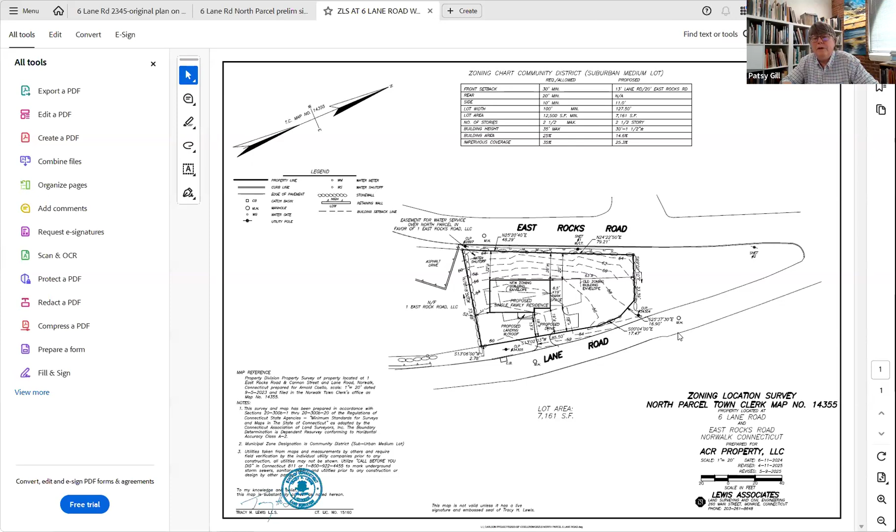Okay, everybody see it? Yeah, so the steep area is staying along East Rocks Road. Keep as many of those trees as we can. We have a driveway coming off of Lane Road. The whole pointy end of the property, beyond our parcel, all the way to the corner is all gonna stay as is, so none of that will change.

So anyway, yeah, so we have a little backup space because you need a backup space when you have a driveway. And then the driveway opens to the garage as well. So that's what's going on there. That's the garage, yes.

Let me know when you want me to show other documents. Well, I sent you, I think, the section through the house showing the slope. Yeah, give me 1 second.

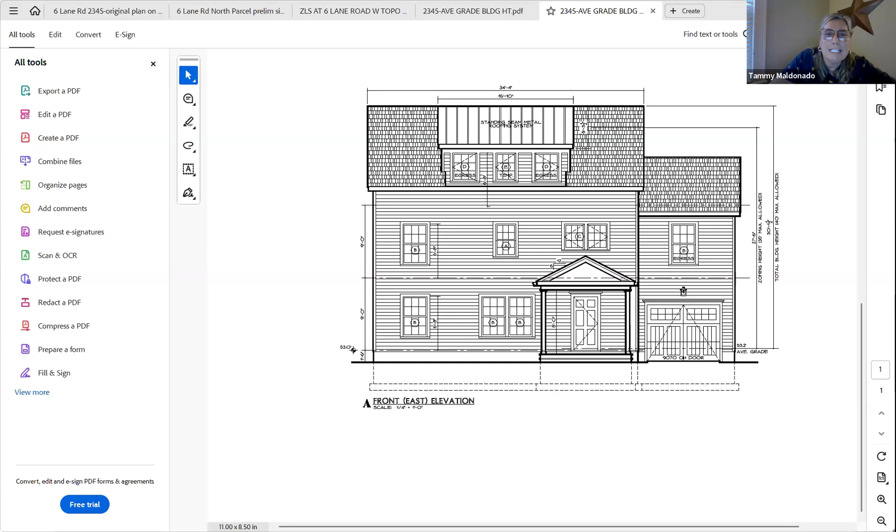Okay, so there, the north side elevation. Oh, you can see it already? Yes, slide over where you can see the actual road elevation because it continues to go up. I don't know if I have it on, yeah, there. So that's where East Rocks Road is, way up, almost to the ceiling of the main floor, and then there's the top, all the way up at the gutter line of the garage.

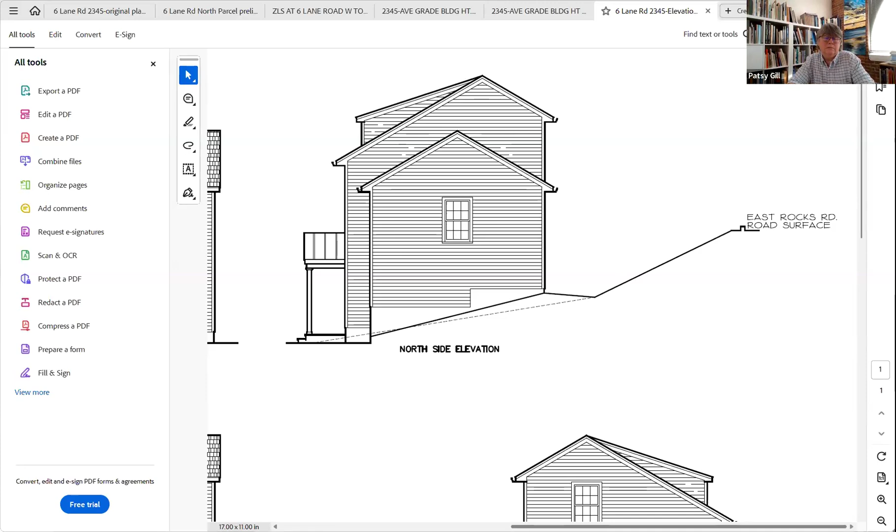Anyway, so there's a lot of trees on that slope. I think the impact from East Rocks Road is not gonna be great. There won't be great impact. And on Lane Road, you just have a single family house with a garage, so it'll be one car in the garage and one car next to it.

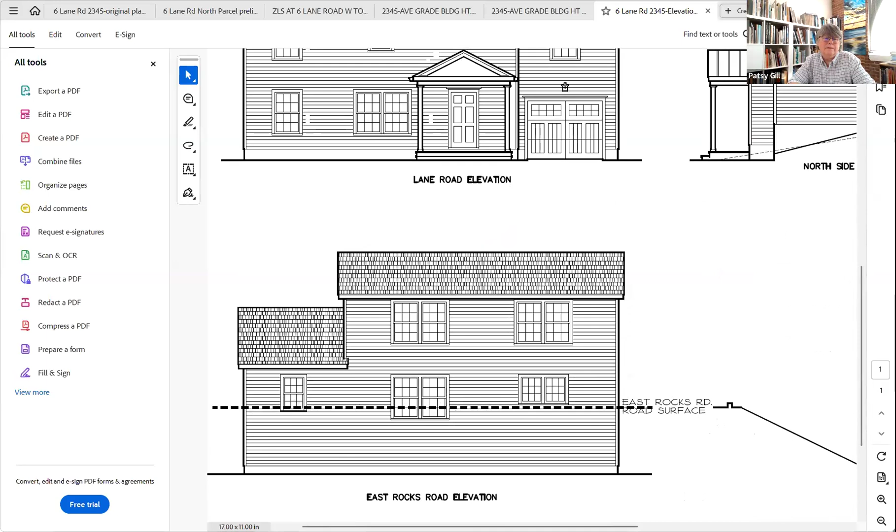So the back, yeah, the dotted line is where East Rocks Road level is. And then that's facing the stone house that's there now.

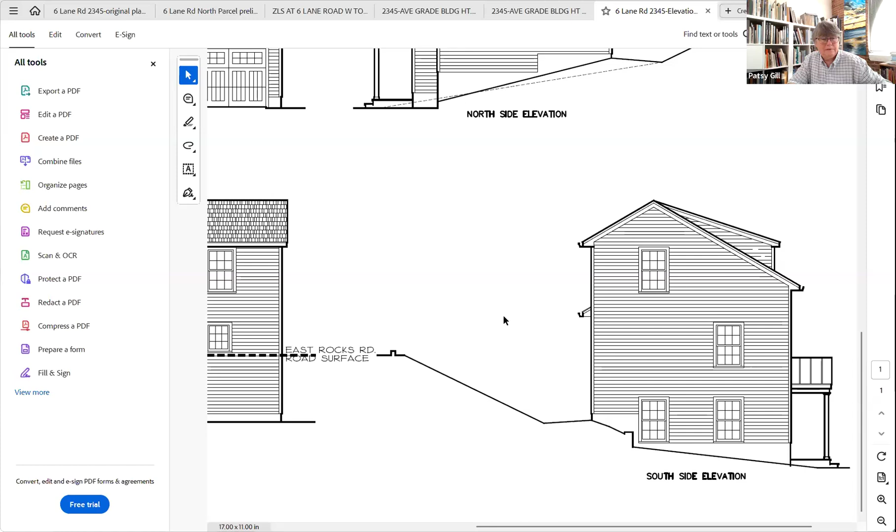Okay, do you guys have any questions? Yes, I saw no indication—I mean, is there any patio or terrace or porch location for this house? Well, there's the front porch, but that's it. I don't have any decks or patios. Okay, so if this family wants to barbecue, where are they gonna put it?

Either next to the driveway there, or possibly in the front yard over there. I mean, they might be putting up a fence, I don't know. Okay.

Is there any proposed landscaping to the north of the house where you've got the 11-foot setback? There is a stone wall along that property line. That's south? Yes, okay. We didn't spend a lot of time discussing landscaping yet. I'm sure the neighbor would appreciate some sort of screening along there. Well, this is way lower than that stone house.

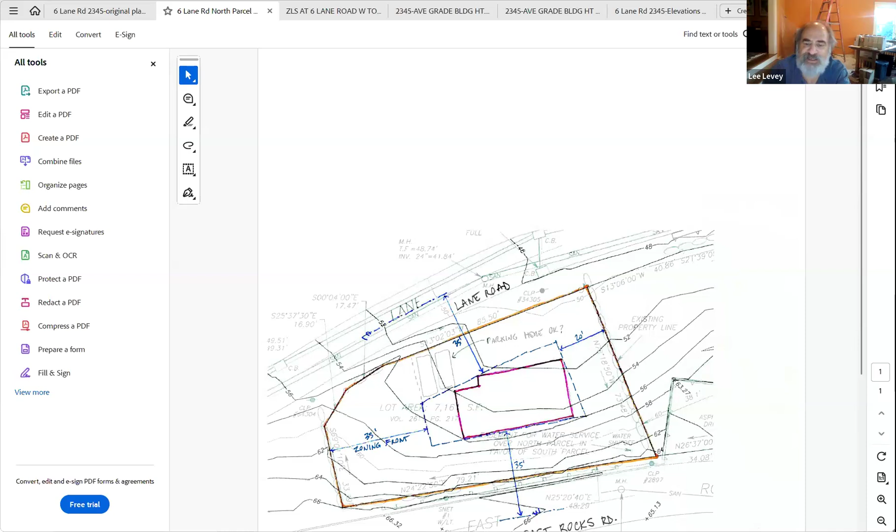My next question is, are you anticipating rock removal or blasting? I don't think we'll need to be blasting. The house has no basement, so we're just doing footings if we run into rock. The house is being set into the hillside, which naturally curves around. Do you anticipate ledge rock? I don't anticipate ledge, but we'll see what we run into.

Can everybody see the subdivision map now? Yes. So the north parcel is now flipped around, so north is to the left basically. On my drawing you can see the corner of the parking area for the big stone house - that little L-shaped piece was showing up. So the whole existing stone house is beyond that.

Patsy, let me tell you what my concern is. With the hillside and setting the first floor of the house, assuming there's no basement - my concern is that if you're going to be blasting or chipping away at rock for the rear of the house, there could be potential damage to the old stone house. Has there been any concern made about that? Are you going to be taking any precautions, such as documenting the existing structure and its condition prior to your work?

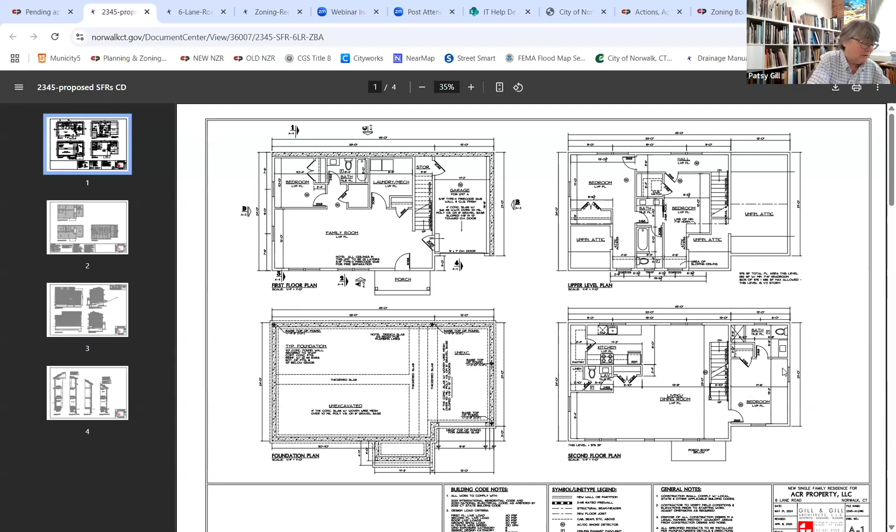How many total square feet in the house? I'll get it to you, hang on.

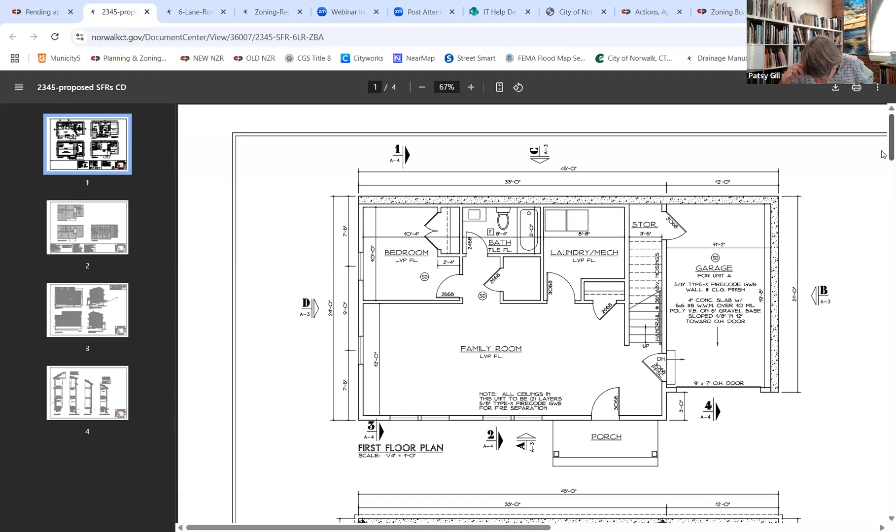There's 976 square feet of finished space on the second floor, and 582 on the top floor. Mostly I figured that out just so I could be sure that it was a half story. That top level is a half story, just 2 bedrooms and a shared bathroom. Oh yeah, there's my half story calculation.

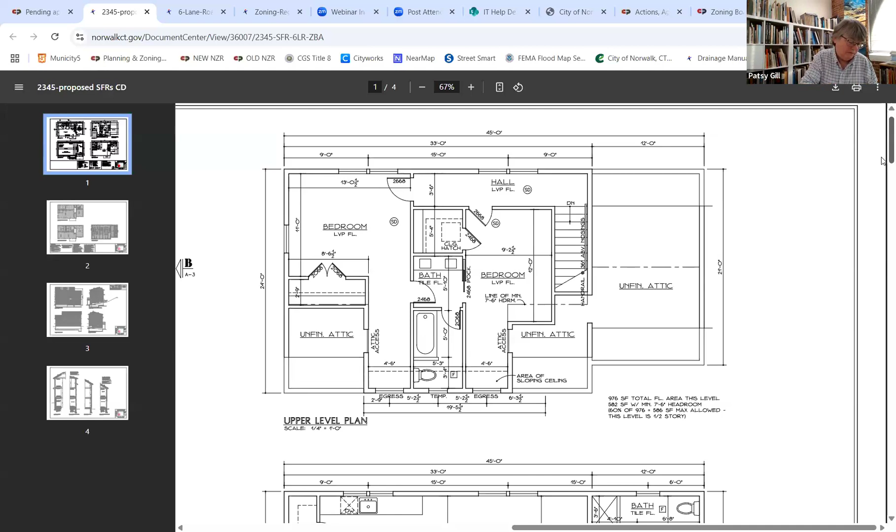Any other board members have questions on this? Yeah, I've got another one.

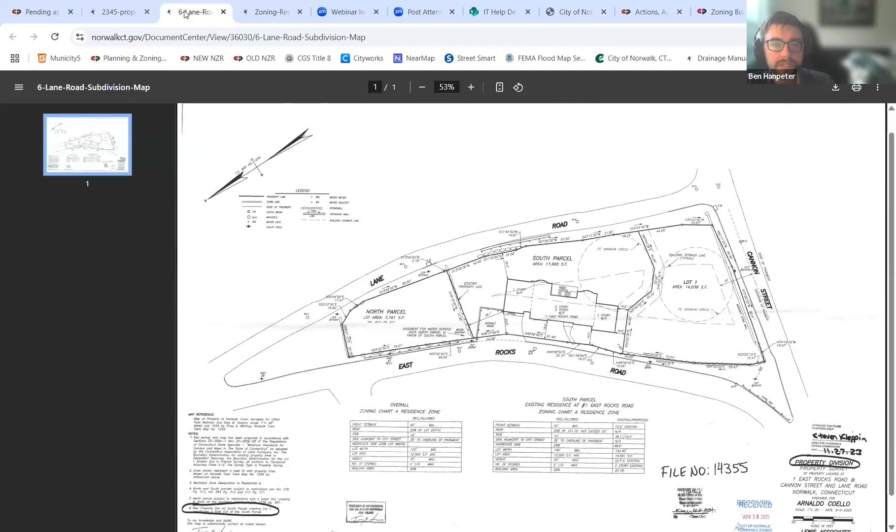The driveway and turnaround area is pretty close to the street. I went by the property today to take a look, and it looks like right around where that turnaround is there's kind of a rise off the street, with a couple feet of dirt. So I'm wondering how you plan to handle that - are you going to be taking some of that dirt away so the driveway is closer to street level? And then what will eventually go in between the turnaround area and the street? I imagine they're not going to be literally right next to each other.

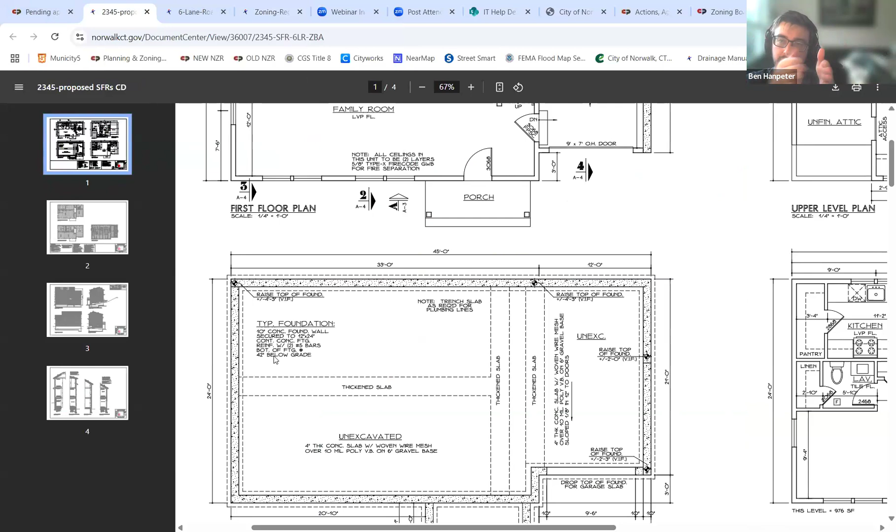No, there's going to be a buffer strip there. And then there's how wide this is - the first 8 feet from the street is still the street right of way.

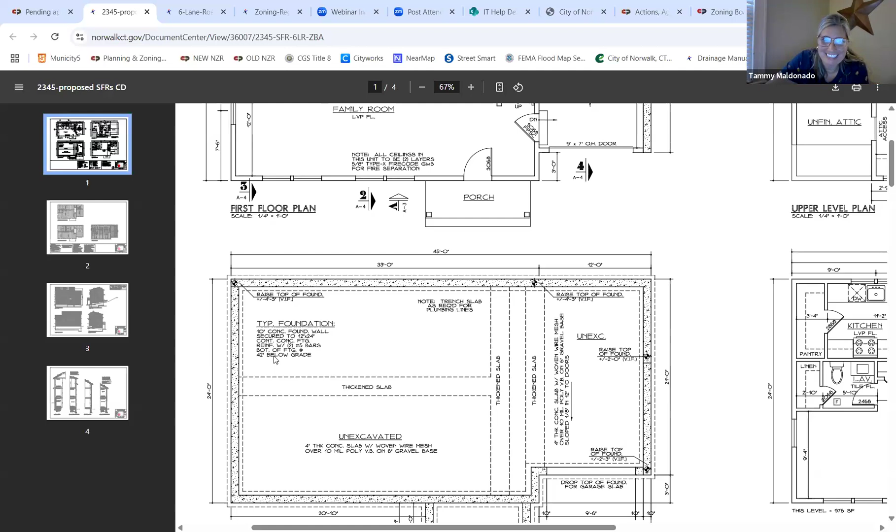So then my site plan - Tammy, could you go back to the site plan? Yeah, I'm trying to, hang on one second. All right, here we go. Can you see it? Yes, thank you.

So the driveway flares out onto Lane Road, and that's 8 feet from the property line to the actual street. It gets narrower as you go north and a little wider south, so I'm just estimating.

Do you have an idea of how much material removal you might have to do to make that work? Not yet, but we're trying to leave as much of the natural grade as possible. We'll level things out at the driveway area, and we're going to fill in a little bit behind the house so it doesn't just slope straight into the house - we have to build it up a little bit to drain the water away. So some of the grade will be manipulated back there.

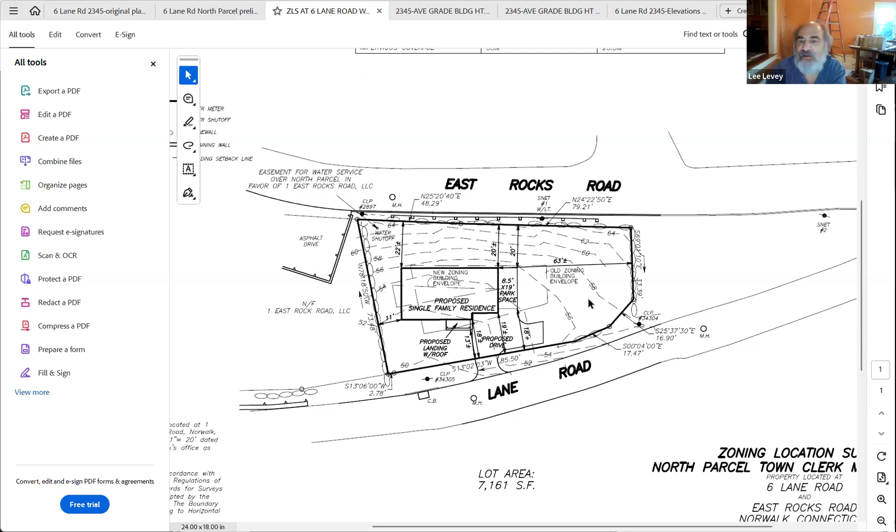How deficient is this lot size? Oh, there it is. So the required is 12,500 square feet. This is only a little more than 7,000 square feet. So you've barely got 60% of the required lot area. Right.

How much building area do you have on the lot, given the required setbacks, if you had to conform? You see the cursor tracing that triangle? Yes, that triangle is the buildable area. Okay, that's pretty minimal. I might be able to fit a treehouse.

Well, I will also assume this house is served by city water and sewer. Yes. Okay.

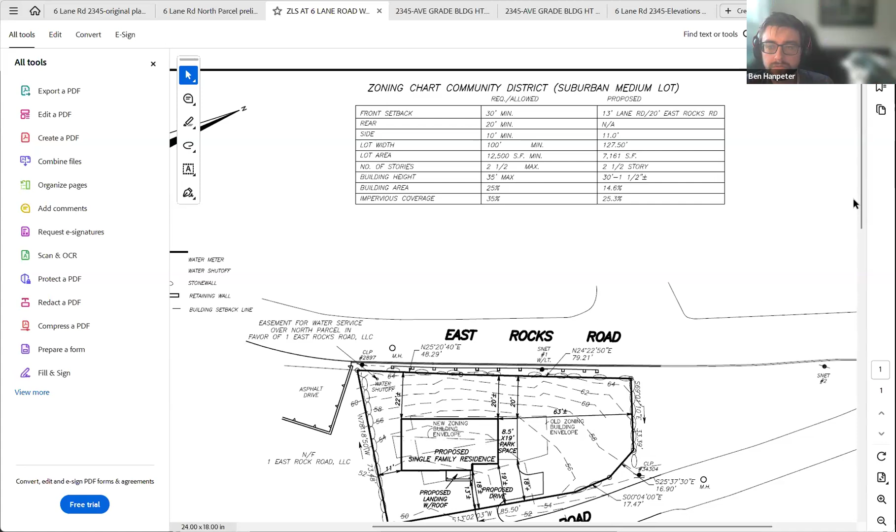That comes off of Lane Road? Or East Rocks? Lane Road, I believe, there's some in both. And it certainly would be easier to come in off of Lane than East Rocks, because again, to get sewer and water off of East Rocks, you'd be certainly going through Ledge Rock to accomplish that.

Any other questions? Well, hearing nothing from the board...

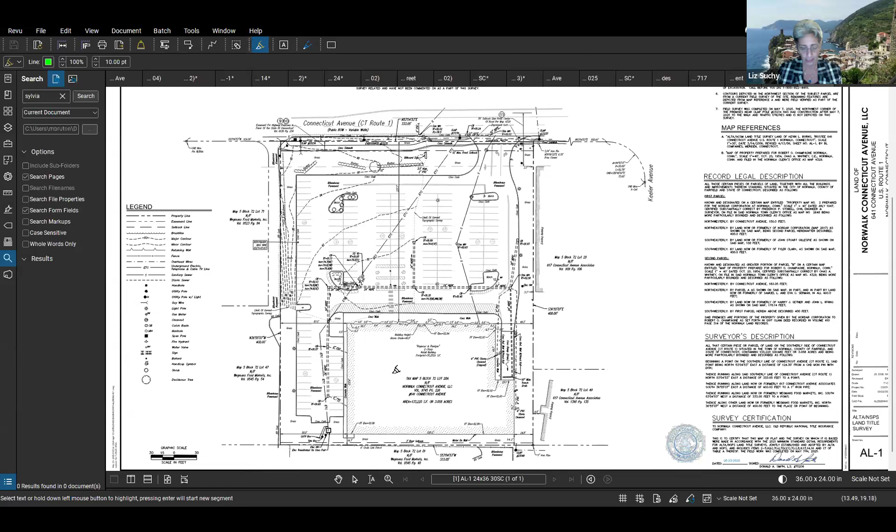So the proposal, a bit unique and fun, something Raymour and Flanagan has done at some of its other locations, is to create this kiosk drive-up or walk-up concept for folks to come and get coffee. There are no reader boards, no pulling up to give your order to a microphone. The barista staff actually meet the drivers, they meet pedestrians if they want to come up to the site, take their order, and then those orders are filled and given to the customers.

The difficulties we have, and that's why we're before you, is that there are a variety of conflicting policies, challenges, and regulations that present some unique challenges for this particular very small development.

The main building where most of the order filling would take place is approximately 530 square feet, less than what an accessory dwelling unit would be in the city of Norwalk, plus a small refrigerated building about 250 square feet, probably the size of a small single-family garage.

So we tried to do what we thought might be best to accommodate our client's desire to locate in Norwalk. If this is approved in whatever shape or form, it would be the first 7 Brew coffee kiosk in Fairfield County. There's one in Vernon, and I think there's one in Wallingford. This would be the first one down here, and it's kind of an interesting, unique concept.

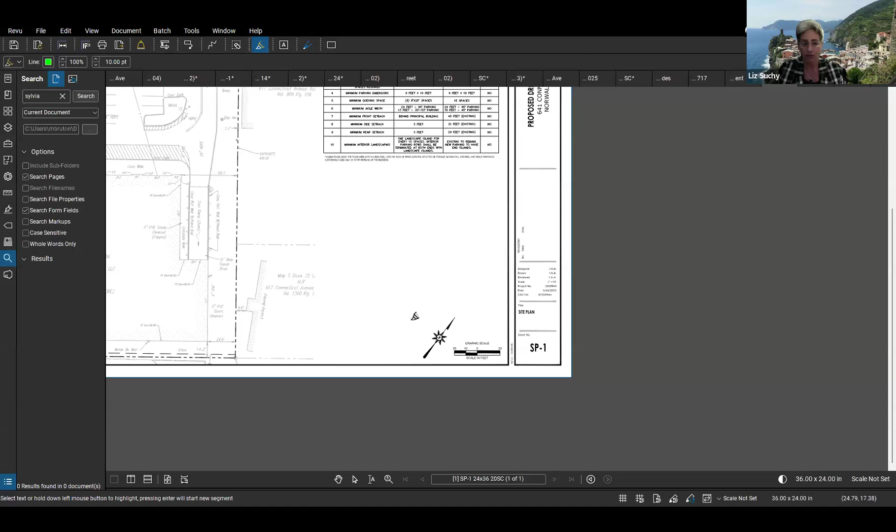There are pedestrian crosswalks proposed inside the site, so individuals can walk up Connecticut Avenue, come onto the site, walk up to the kiosk and get coffee if they'd like, or whatever other specialty drinks are available to them. It's very hard to come up with a 2-story structure for such a small required space, 530 square feet, making it 2 stories. I think the second story would end up being not used, much like the Starbucks at the Darren Plaza.

It's a 2-story structure, built under the prior regs that required that 2-story structure. That second story is vacant. The same is true for Chick-fil-A down the road. 2 stories were required, and that second story is vacant as well. I think for a very small structure like this, that second story would be space created really for no reason. So I think those are the real hardships we're wrestling with.

Those are the challenges and difficulties that applying the new regs onto an existing built site make it very difficult for us to comply. In addition, we had some discussion with staff that perhaps this shouldn't be viewed as a principal structure, but an accessory structure. If it was an accessory structure, I think we would comply in all component parts, but that was not a concept readily embraced by the staff for whatever the reason. So that's where we are.

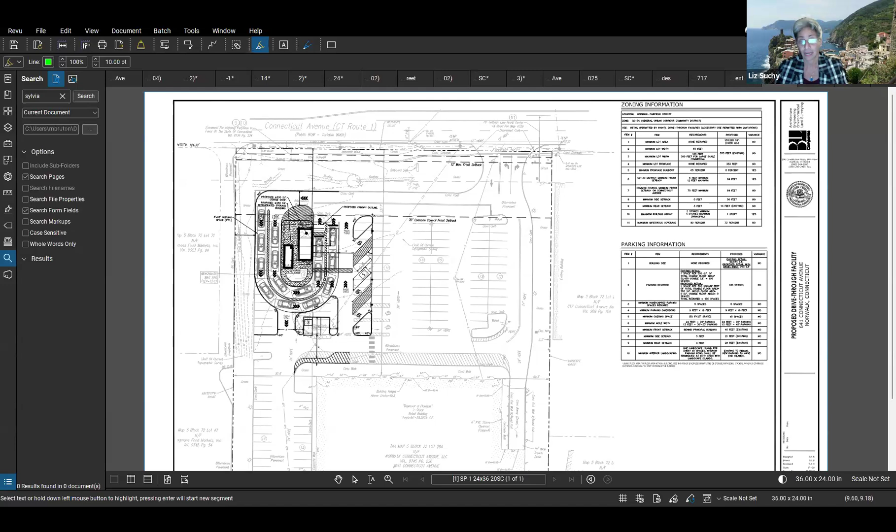We'd like to think that this is a concept that the commission, this board, would see some value in. It would activate a portion of the lot that is just asphalt, parking spaces, some activity. There'd be some additional green space created. We would abide by the 70-foot common council front setback and leave that whole planted row, that whole green space that exists from property line to property line in its place. And that's a very wide planted component of this property.

How wide? Matt, how wide is that about?

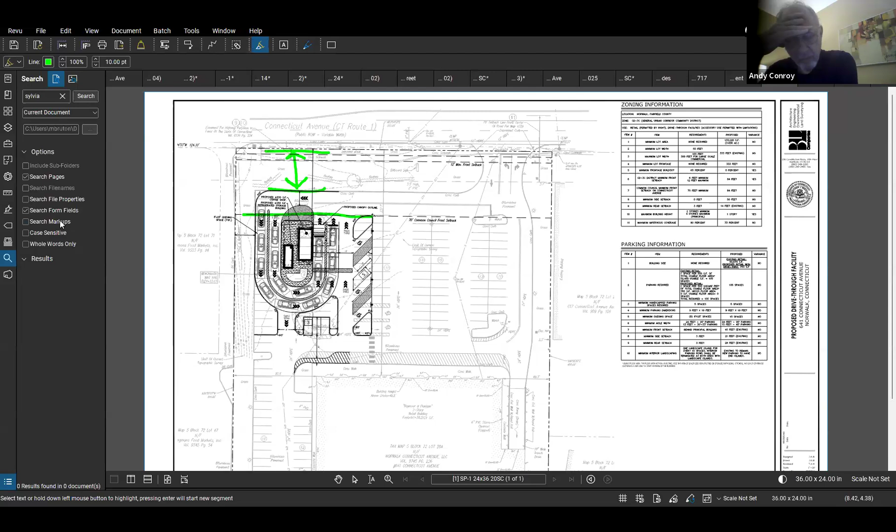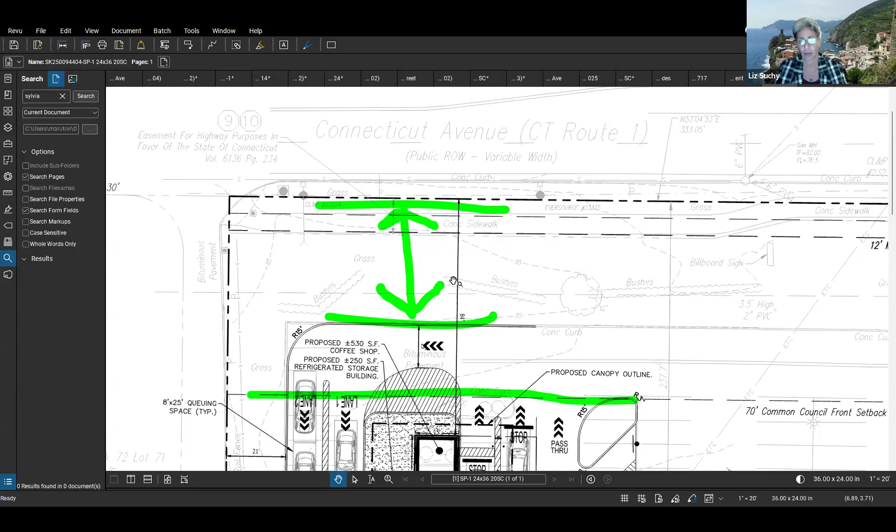And while he's measuring that, that's the reason the common council setback is why you have some of the properties on Connecticut Avenue on both sides have such an open distance between the property line and where construction or parking can be. The same is true on Westport Avenue, and the same also exists in certain portions of Main Avenue. I think Westport Avenue is a 50-foot setback from center line, and Main Avenue may be 70 feet as well.

So there we go, it's just about 32 feet. And there are bushes and some trees. Is one end of that arrow the property line?

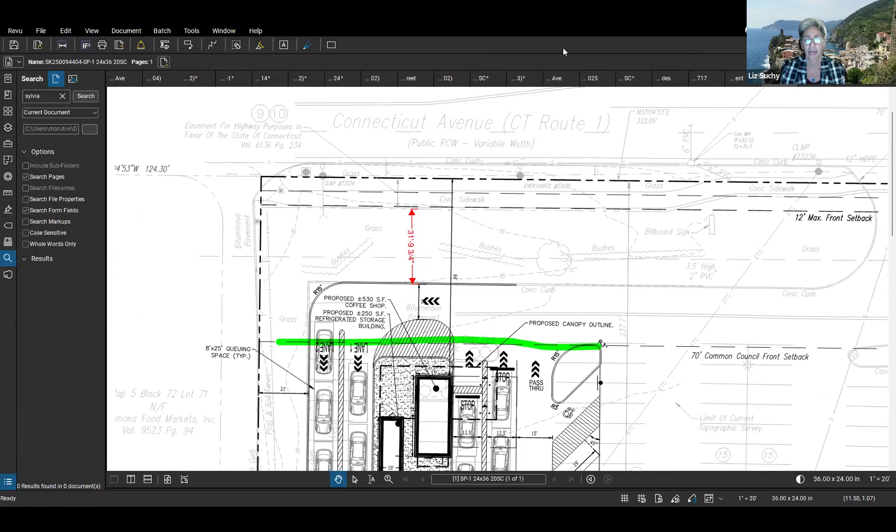The 31 feet is measured from the back of the sidewalk to the back of the proposed concrete curb. Matt Bruton, professional engineer from BL Companies, 355 Research Parkway, clarifying the property line measurement.

This is about 32 feet to the concrete sidewalk, as labeled here. If we were to go to the property line, which is this bold line, we're about 45 feet. So the sidewalk is the only thing in front of it. I can give you a Google Street View if you haven't been out there recently, showing the sidewalk along the frontage, mature trees, bushes, and planting beds.

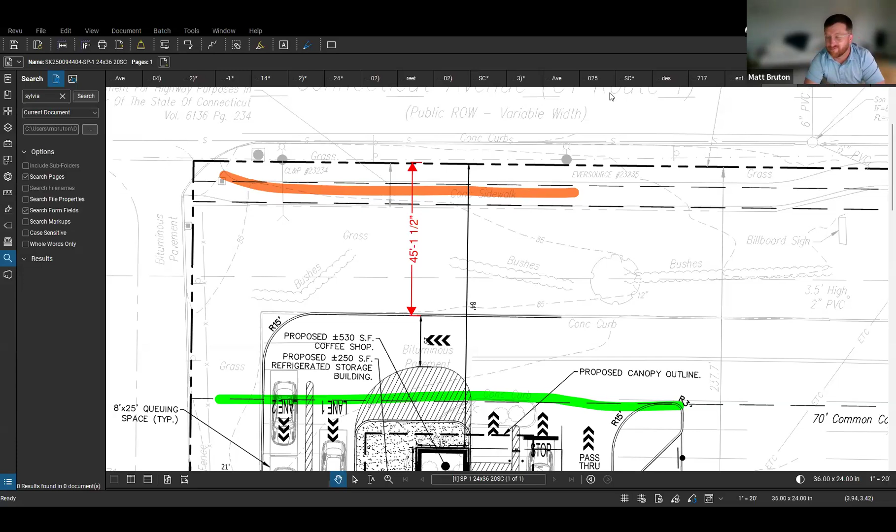You can see the Raymour Flanagan in the background. If I pivot here, you can see this is pretty consistent along the whole frontage of the property. We thought it was valuable to allow that to remain instead of shoving a small building within 6 to 12 feet of the front property line, which are the minimum and maximum dimensions under the new regulations. We thought it would be more beneficial to keep that green corridor from property line to property line.

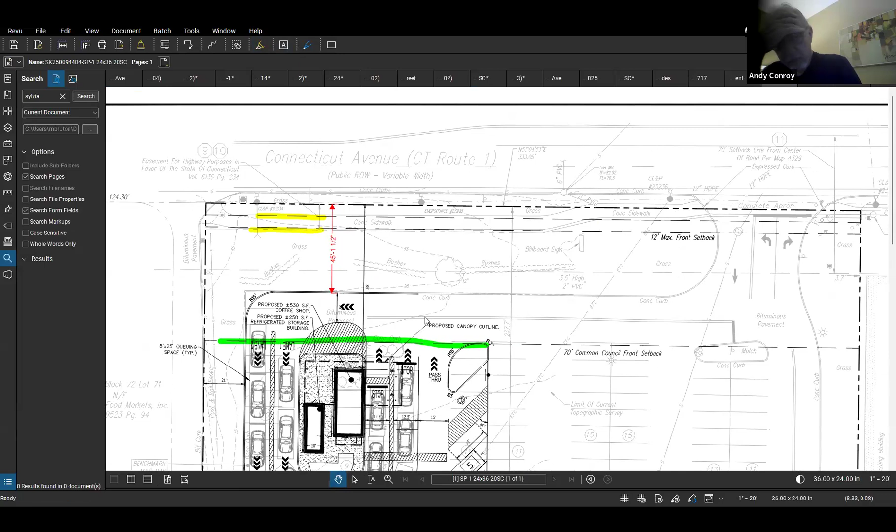If you took the two structures and made them parallel to the road and moved them right up to where the green area is, then ran the circular traffic area along the side, with the other side facing out to the sidewalk, maybe with some glassed-in areas on the building to make it more attractive—is that a possibility?

I would imagine that it is. The only difference is we probably could comply with the maximum 12-foot setback, and we probably could redesign the building to achieve the 2-story if that's something this board deems absolutely essential. However, that 60% maximum building build-out along Connecticut Avenue, that we can't achieve.

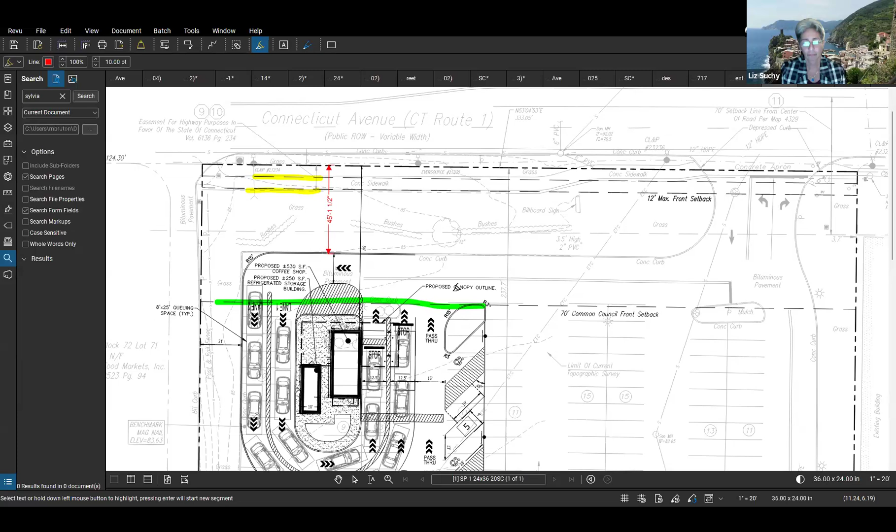Chairman Conroy, you're absolutely right. If we were to make the buildings parallel to Connecticut Avenue and bring them closer, at least I would suspect one variance may be eliminated, and with some design work on the structure we might even eliminate the second. We just can't get that 60% frontage build-out—it would have to be a very long, 150 to 160 foot long building for a kiosk.

I don't think your business requires that kind of frontage. No, it doesn't, it doesn't. And it would look absurd to create it. So I'm sure the variance could be had there, but I don't know about the second story—I'd have to hear from everybody else.

Rather than spend an inordinate amount of time and waste your time, if this suggestion or alternative is something that, after the rest of the members weigh in, you'd like us to pursue, I'd ask that you consider keeping the hearing open. We can devise a plan to perhaps eliminate one, if not two, variances, bring that plan back to staff, and come back to you in August with that alternative. Maybe the principal planner and zoning enforcement officer might see greater value in it.

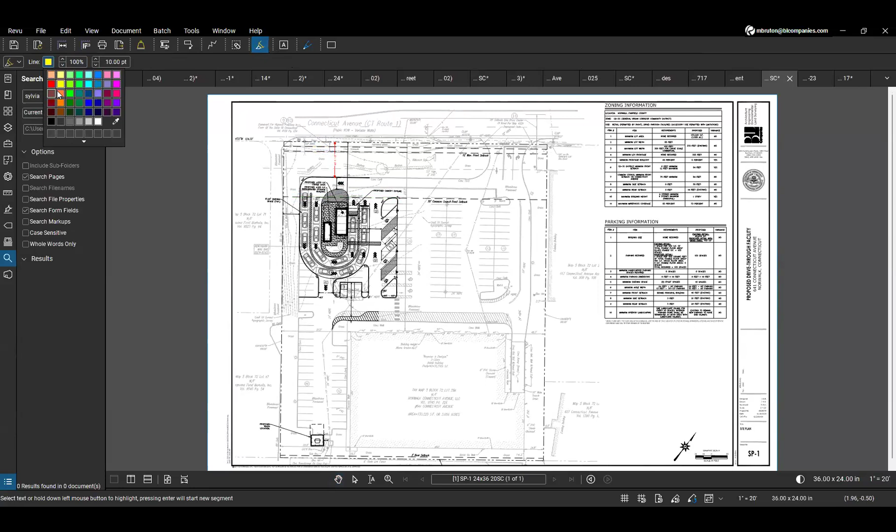Mr. Chairman, while I totally appreciate your effort to help us find a way to take away one additional variance with the setback, I'd encourage you to think—and it sounded like, I was just listening to Danielle read the planner's comment, and I just want to note that it sounded like the overreaching theme was to make things more green and walkable. And if we push this building, we spin it 90 degrees, put it in parallel, and push it to the front of the building—yeah.

I totally agree with you. It gets much closer to your code, sir, but it's going to take up green space. So my parking lot will remain asphalt.

Yeah, before you go too much further, what I was talking about as a possibility is moving the building—just think of it at the moment—building up against the green, maybe intruding slightly into it and running the traffic along the side facing Raymour & Flanigan. And you could pretty much use the design you have for turning cars around, but tilt it, move 90 degrees. And you can take all your green and add it, and I think it would work.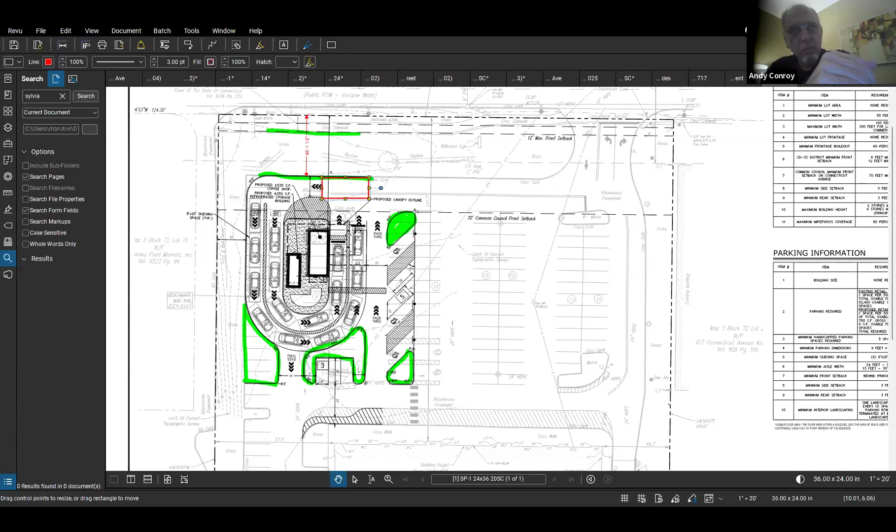I know that you can't meet the distance requirement, but you can come a lot closer, I think. Yes, sir. If that's something the board wants to see, Matt is fantastic at what he does. And I know that Wade and his team at 7 Brew will work to be accommodating.

I would also just consider the zoning staff memo that was read, and really think about: is there a way that this business works where it's not an island in an all drive lane? I think if we're really trying to make Route 1 more pedestrian friendly, making buildings that are primarily going to be completely encircled by cars is not in line with zoning staff's goals.

Yeah, Danielle, what they were recommending was not circling the building. Right, but I just want to clarify that it's not just taking the circulation and rotating it. It's really considering how does the circulation work, and how does this business work—maybe a little bit differently than some of their other concepts—but how does it more seamlessly blend into the zoning goals of the city of Norwalk?

Right, and the green that they have around the traffic circle and the parking, I think, is something they want to maintain. That helps get rid of the enormous ball field of asphalt.

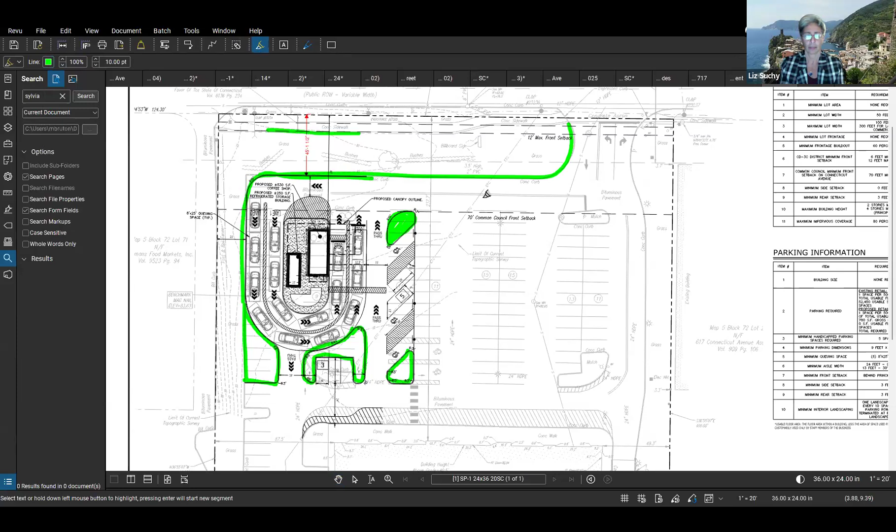So, Mr. Chairman and other members, and of course I don't want to speak for others or prevent you from chiming in and sharing your thoughts and comments—is it your preference that we take a look at Commissioner Suchy and Chairman Conroy's ideas, provide a revision to staff, and present that to you in August?

Speak up or forever hold your peace. I think it's a worthwhile exercise. I think bringing the building closer to Connecticut Avenue without automobile traffic between the building and the green space would certainly encourage walk-up business from those using the sidewalk and bus stops. I do think it's a worthwhile effort.

So that was positive, I think it's worthwhile taking another look. I did have a final question related to access to the shop from the road, which we've just talked about. Also, I think what was mentioned is that your staff at the business would also use this, and it wasn't clear to me if there are any pedestrian safety issues, either walking from the store or walking from the street.

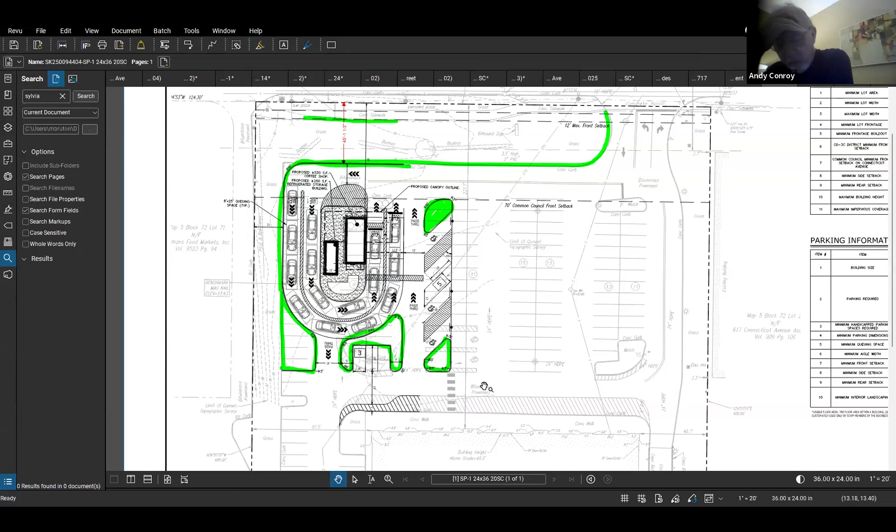Let me ask real quick. We have Popeyes, we have Chick-fil-A, forced to 2 stories. And how big Starbucks is this, as well? How big is this building compared to, let's say, Popeyes?

I can't say with specifics, I can certainly get that to you, but this is 500 square feet. Popeyes is a restaurant where you can go in and sit, and it has a circulating drive-through in the back. Starbucks, I don't remember the numbers offhand, but it's certainly larger than 500 square feet, as is Chick-fil-A. I can get that information for you. What I was wondering is if this building's too small to try to push it up to 2 stories. That's what I was wondering.

Chair and board, if I might step in -- Wade Harden, 2710 48th Street, Springdale, Arkansas, with Corporate 7 Brew. I think you'll find that the majority of Popeyes are probably between 1,600 and approximately 3,000 square feet, so probably three plus times larger than the structure we have here. I think we hear the concerns as far as rotating the building and addressing the street frontage. I think there are some things we can do there.

We hear that. I guess one clarification to the two-story point -- could you elaborate on that or provide some feedback? I think that's where you were going, but that would be helpful. I don't have the answer, I was hoping to figure it out. But one aspect would be the difficulty of making a very small building 2 stories. I think that could be an issue, and a variance for that. But I wanted to compare it to other approvals we've given where only the 2-story requirement was met.

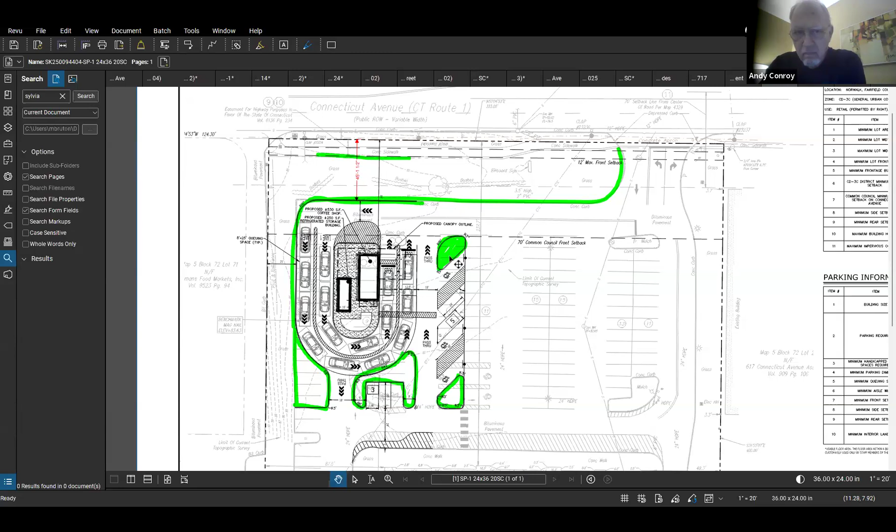Well, I'm going to weigh in on this. I don't see the necessity for 2 stories. I see one of the problems with a structure of this size having 2 stories -- it requires, because it's a commercial building, 2 means of egress. Where do you put 2 sets of stairs? That's almost 500 square feet unto itself. Yeah, I think it's problematic.

I think Mr. Lyon and Chairman Conroy were -- 3 of us at least -- probably leaning in the same direction, and that is that 2 stories is a requirement, but it's a practical difficulty, it would appear. More to the point, in addition, if you've got precedent where, did Ms. Suchy say, 3 other businesses have been required to have 2 stories and they've got empty space? It seems not smart to build things that you're pretty sure are not going to be used.

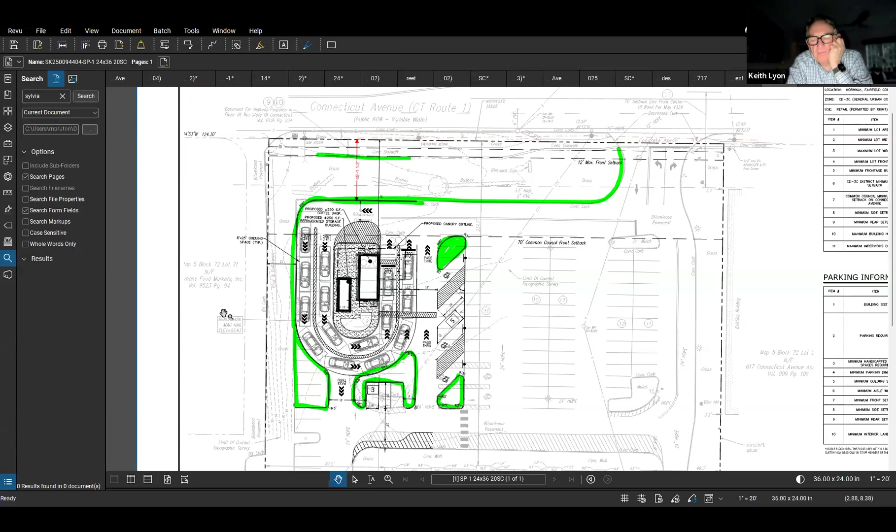There are 2 that I mentioned, Starbucks and Chick-fil-A. I know personally those upper floors are vacant because I worked on those particular buildings. I believe the same is true for Popeyes. I can confirm that.

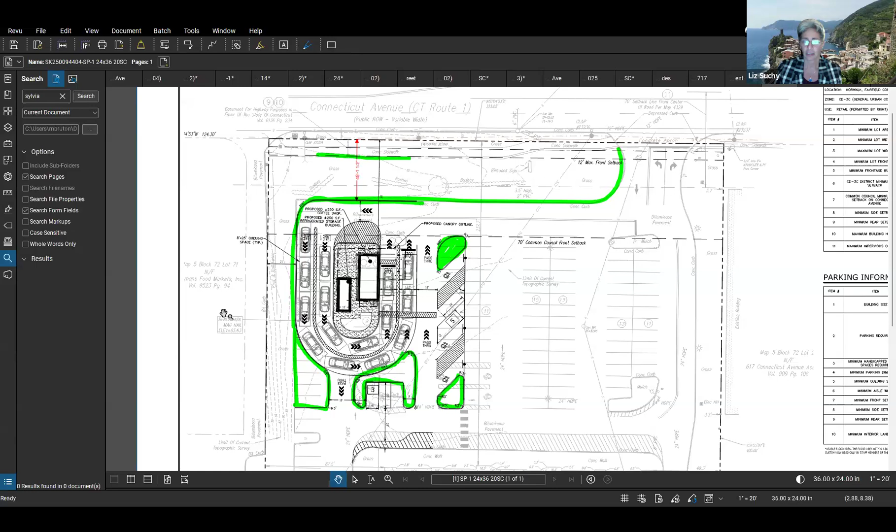Chairman Conroy, for your information, I can get the square footage numbers and have that for next month, so you'll have a comparative to what this is. There are several others in town, for example the Burger King up at the Stop and Shop on Main Ave, south of the Merritt interchange. That's a 2nd story, I'm not sure if that's vacant, I believe it is. But if there are others in town, we'll get a list and the comparative square footages to give you a better sense of how this compares.

The 2-story McDonald's does actually use both stories. Yes, it does. Danielle is about to break out laughing. Andy's too familiar with McDonald's. It's the play place, we know it's the play place. You're going down the 2-story slide.

Something like that. Danielle, you being an architect, is any of this making sense to you? Yep, I think it all makes sense. Okay, then we're happy to review and come back to you and see what we can do to address your concerns, and we'll go from there next month.

How's that? That's good. I have a question for Liz, hold on. Andy or Liz, for when you're done, not tonight but in the near future, would you give me a phone call to talk about not this, but business gone past? Certainly, I'd be happy to, Mr. Conroy. Thank you. I have a question for Andy or for Tammy.

So if we choose to issue a continuance, that would have to happen before the public hearing's closed and also before deliberation, right? Yes. Okay. Because I don't really have much in the way of questions about this application, but I definitely have some thoughts about it that I was going to save for deliberation. But if we're going to continue it, then I'll just say it now.

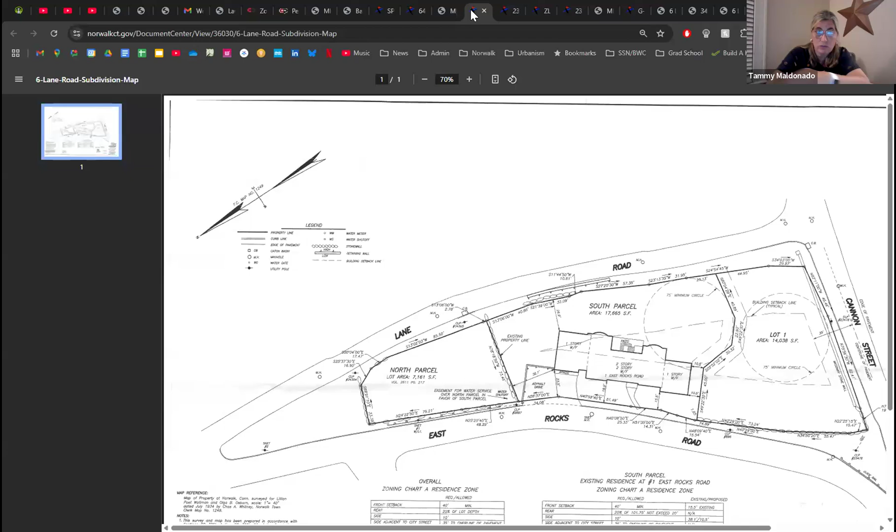Well, in this zone there is a principal and a secondary, but they're the same for CD1M. For CD1S, which is smaller lot zones, your principal is 30 and your secondary is 20. Under the old building front footprint, their zoning front was actually that little rock wall sliver to the north. But we can't count it, because when you go 30 to 30, it compresses that building envelope so that it becomes, even if there's no need to apply another setback, forced way back there. The setback would sort of be 30, 30, 30, but you can't really.

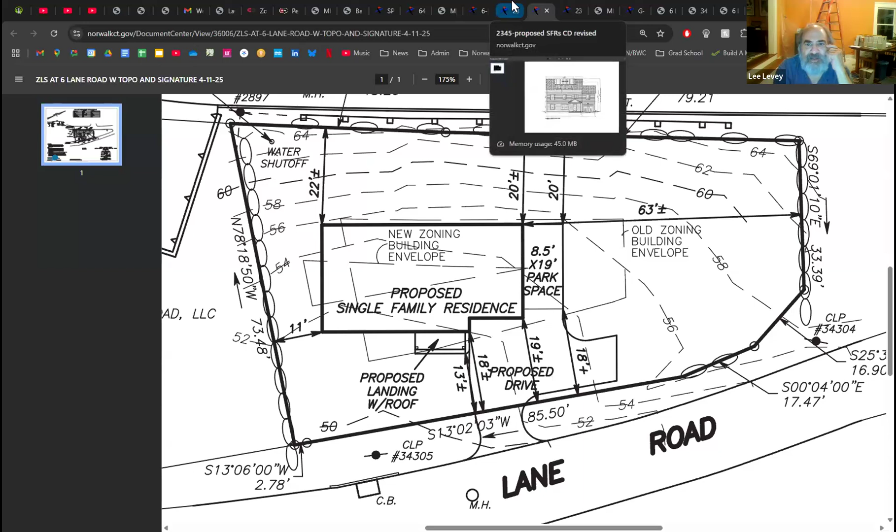Remember the line that they showed, if you were on East Rocks and looked at the building, there was basically a level line going across the house, which implies to me that they had to excavate somewhere between 7 and 10 feet for the back of the house. Yes, they're burying the first floor into the hillside.

Go up to page 3, and then over to the section. I think it's the side elevation, it showed it very well. So if you just scroll it over, squeeze it down a little bit, then they know what it is.

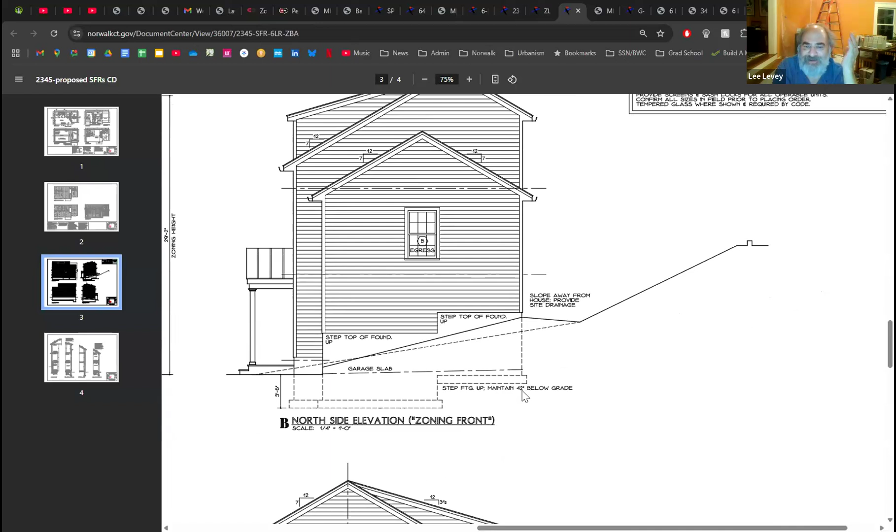Is this the line? No, it can't be, because it wasn't that far up. Yeah, that's the line. Well, then they've got to dig down, and I'd be shocked if they didn't have to blast. Well, they don't know what rock's under the ground, 42 inches below grade. Doesn't look too far down, at least not to me.

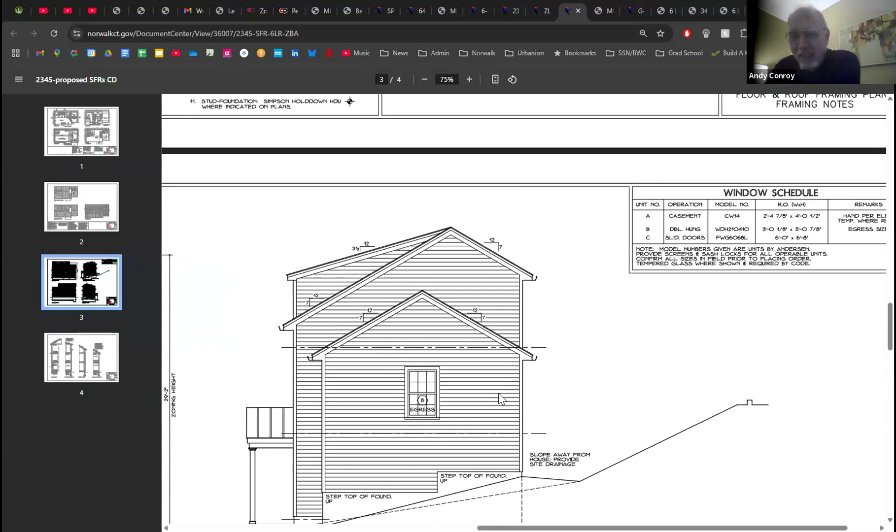The glacier that went through here didn't leave a whole lot of dirt. You're not that old, Andy. You'd be surprised, I know Methuselah, he's a friend of mine. Oh, very good, very good, see you at O'Neill's for trivia night.

But remember, I'm not voting on this, you guys are. So Lee, you're gonna have to keep it together there.

I would like to raise a very important point that Ben brought up, of wider implication than this one application. Can the new zoning regulations be considered a hardship? I thought not. The only thing that you could do is if you did your application before we adopted it last February, then you get to exist under the old regulation. So that's the hardship, if you'd already applied.

I'm pretty sympathetic to this, except for the fact that she mentioned that they did have the house designed, like they were gonna do it, and then the regulations changed. Well, okay, then you should have done it.

Some people own property around here for 20, 30, 40, 50 years, and they don't pay attention, and then they would need a bunch of variances so they can build. As long as, at least my recollection, the board, as long as the variances were not particularly large, because it was a small lot, we generally approved it, disregarding any other problem that might have emerged.

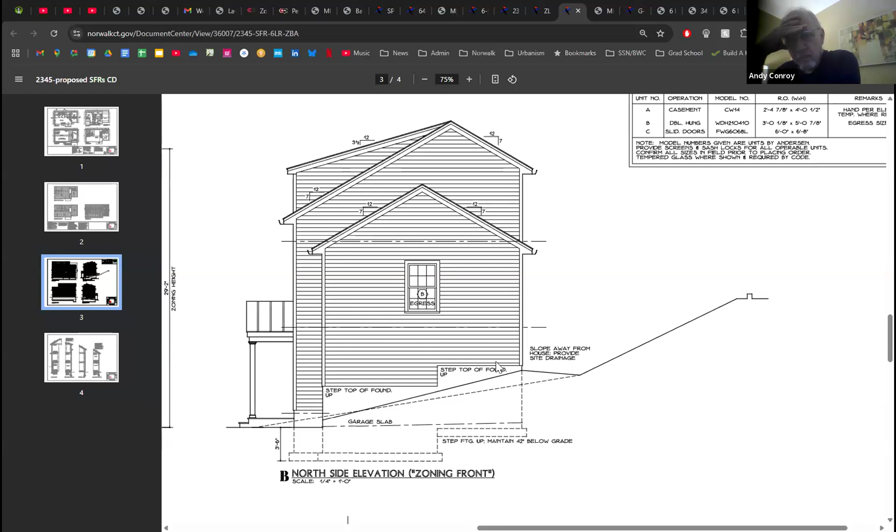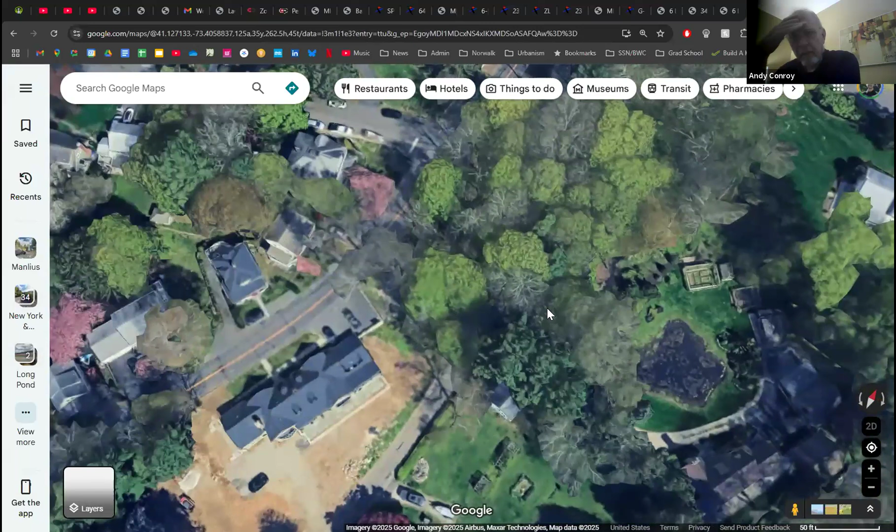The other thing that bothered me, and I brought it up initially, there is no outdoor space for this house—no patio, terrace, or porch. Is a family going to buy this? On the empty triangle of land near where we're looking now, are we going to see plastic play structures? There was no site development shown to us at all. It's as if the house was dropped on the site, and that would be my reason for denying this—I don't think a lot of thought has been put into site development. What you could do is tell your folks to deny it without prejudice.

I was going to get to that point. Are we ready to call for a motion on this? Without prejudice allows them to resubmit, I forget exactly how that works. If we deny this without prejudice, they can come back next month with a revised application. If we deny it in total, it's dead.